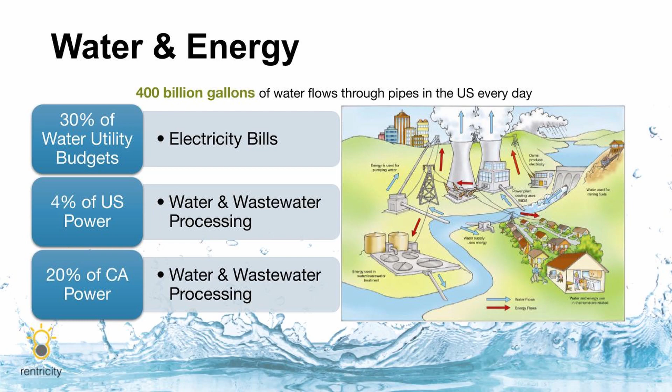But first, did you know that we move over 400 billion gallons of water through pipes every single day in this country? And about 75% of that is gravity fed, meaning there's all this excess pressure that needs to be dissipated before it gets to you at home. We used to use traditional technologies to do this, but now today we have smaller micro turbine technologies that allow potable or drinking water operators to install them.

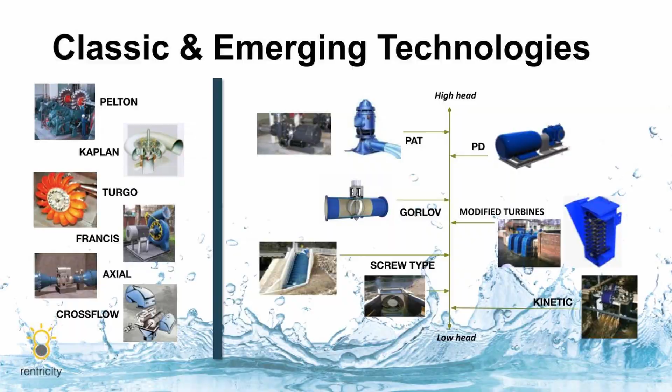So Rick is exactly right. When you turn on your water or use water at your home, you are potentially providing the basis for creating energy recovery right in your water system. What I'm going to do is show a brief video and allow you to see how this actually works. And then we're going to talk about an example of a project that we've done in Keene, New Hampshire.

So we have this building that has these pressure regulator valves, and we install a turbine generator which performs the same function of that valve, but it spins a wheel or an impeller and makes clean electricity. And we do this within vaults that are under the ground or above the ground, which you don't typically see because water infrastructure is hidden.

So basically, Rentricity works with drinking water companies to design systems to recover energy where valves are normally placed to regulate that water flow and pressure before it gets to your home. And the company has been doing this since 2012 commercially and has 15 sites in the United States and one in Canada.

And these turbine generators are now smaller and more modular and can be fit within the vaults and the infrastructure that is right under the ground on the edge of the street. Basically, it is hydropower at a micro or pico level. And we'll show this video again right now.

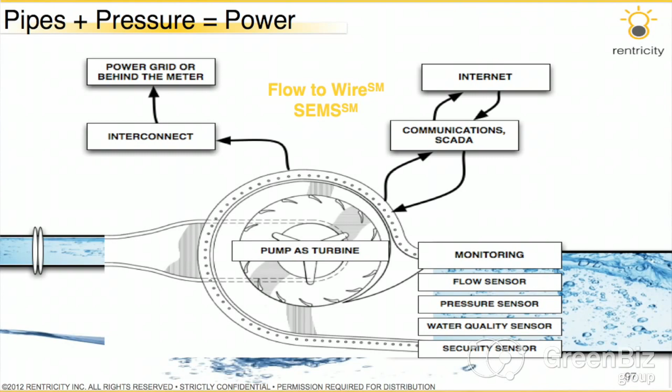We take that power, we put it on the grid, or we interconnect it to a local pump station or a water treatment facility. We also have the ability to power up sensors and other water quality devices to make the water grid much smarter as well. We've done this before. Our City of Keene project is the most notable. It is the first energy-neutral water treatment plant in the state powered by its own inflow of water.

What you're seeing is a typical vault that's above ground, in this example, with all of the pipes and valves that are typically inside it. We install a turbine generator around that valve to perform the same function, but to capture that wasted energy that's dissipated by that valve and make a clean form of electricity which could be transported to the electric grid.

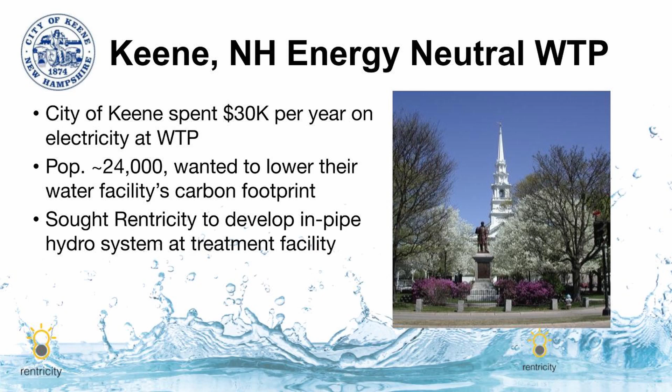Okay, Keene is a city of about 24,000 people, and it has, I believe, a university and a college both in there. And in 2012, Keene was very interested in exploring the use of a microturbine to improve their sustainability objectives and clean energy objectives.

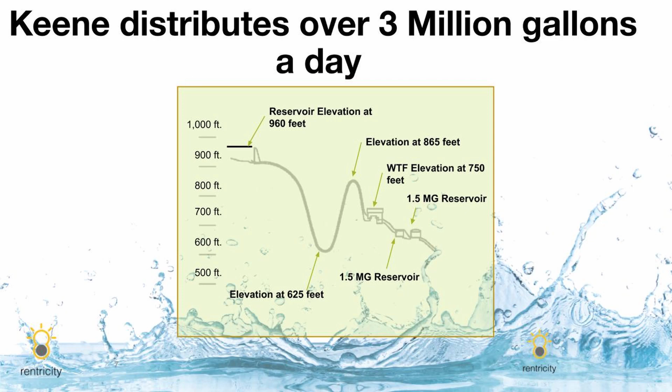They contacted Rentricity, who provided the basis for doing engineering of their 3 million gallon a day system, which delivers water from a high elevation to a low elevation, and then brings it into their water treatment plant. They deploy a regulator valve at the inlet of this plant, which dissipates the pressure. There's also a flow variation of between 700 gallons a minute and 2,100 gallons a minute.

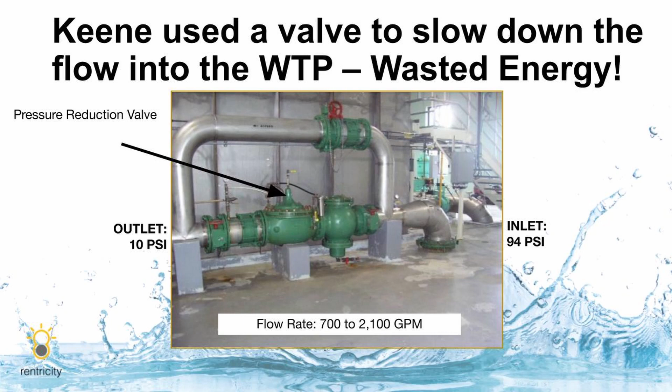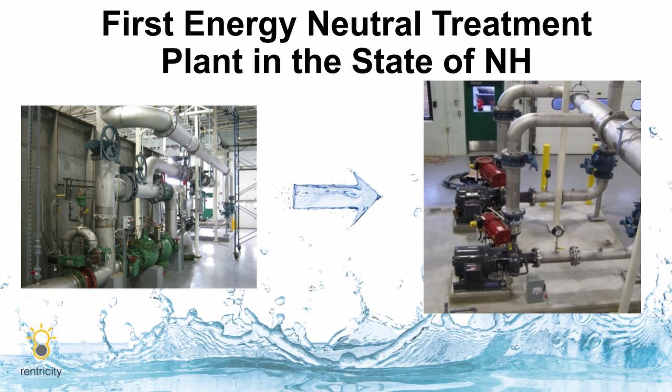So ultimately, we designed a dual microturbine installation to perform the same function of that valve, where when it's low flow, the small turbine is on. When it's medium flow, the bigger turbine is on. And when it's high flow, both turbines are on. And ultimately, the Keene installation and turbine generators make this entire water treatment plant energy neutral, powered by its own inflow of water into the plant.

Keene transports all of this electricity to the Public Service of New Hampshire and enjoys the benefit of a net zero energy water treatment plant, and has been operating it now successfully since 2012.

Keene has been able to save approximately $25,000 a year in electricity costs, and then get some additional benefits from Public Service New Hampshire, and will in fact save over $1 million over the 30-year life of this equipment. So they are enjoying providing this capability to the drinking water users of Keene, and running their water utility in an energy efficient manner.

So if I was to try to make this really understandable by most people, in conditions where we have a tank that's elevated, that's either delivering clean water or treatment water to a treatment plant, we have gravity because of that. Now if you design the system so it takes energy recovery into the equation in the design factor, because I've tried to talk to water departments and they kind of say, well, we have zero gain, there's no head. We designed the system to be perfect the way it is.